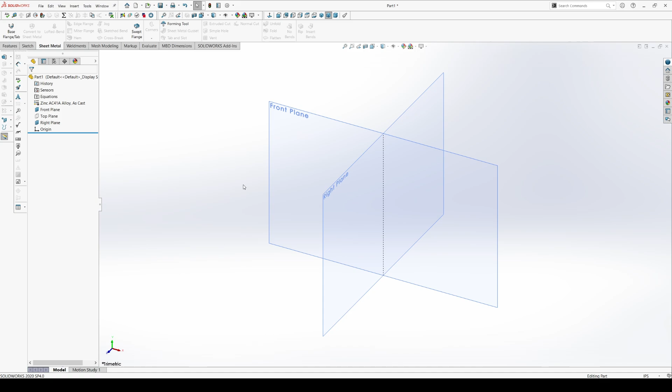So that's the very first step. You set your dimensions in inches and you set your material to that zinc alloy. And then you'll get started here.

You'll select the front plane and an extruded base. We'll just kind of sketch this real quick. Let's see what we come up with here.

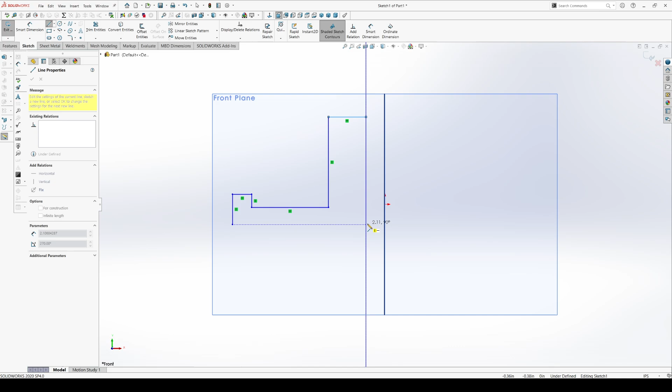Okay, you want this and this to be collinear, and we don't show the top plane, but we should show it, because we want this and this to be collinear as well.

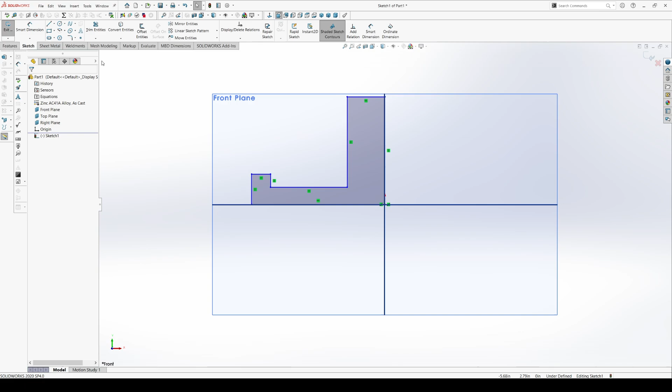Next is our dimensions. So we know this one is 5.375. We know this one is 5.375.

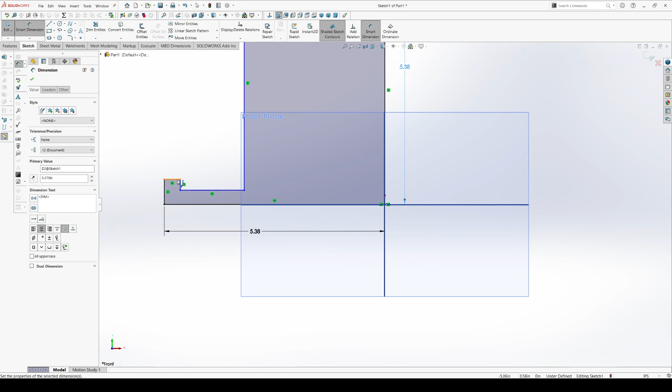It's getting a little funny looking, so we know this one is 3. And we know this one is .375.

Let's see what else is there. This one right here is 1.75.

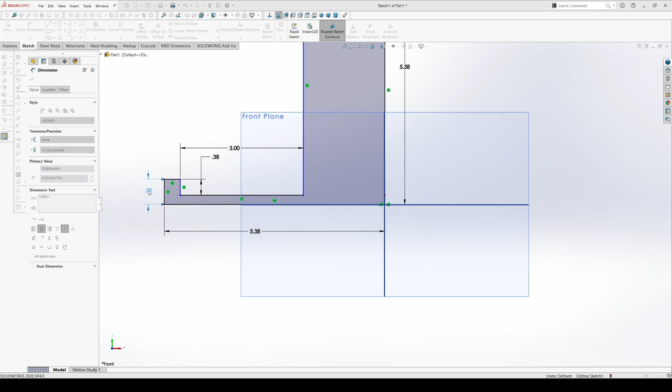And finally, this one right here is 1.25.

So now everything is constrained and everything should have turned black. And you can just hit the check at the top right.

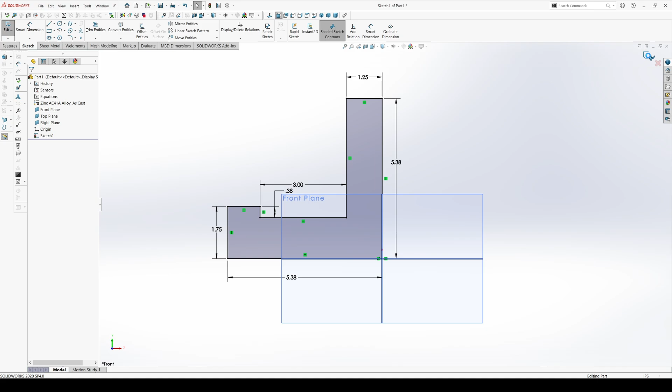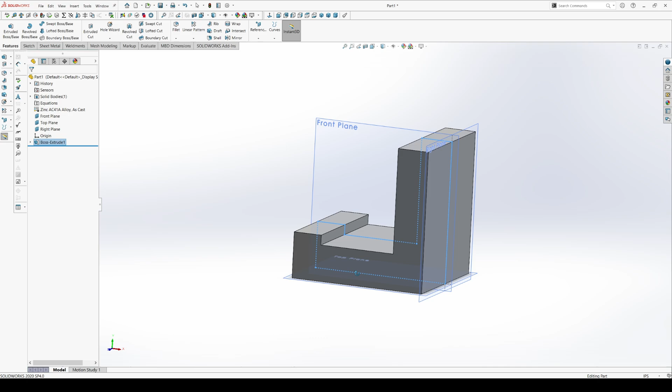And you'll start extruding. I like to use the direction as mid-plane, and then our extrusion should be 5 inches wide. Okay, so that's how the shape looks now.

We can get rid of the planes, so hide all of them. And I like to do... oh, you know, we skipped a step here.

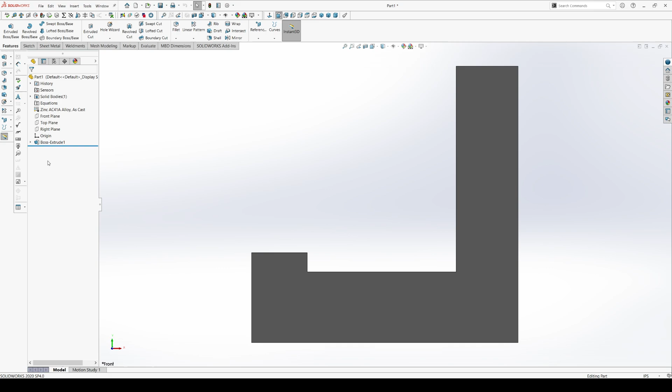So go back into this view and get back into your boss, your sketch for your boss, and say edit sketch.

And there's a fillet. So click on fillet right here, sketch fillet. And you want to click on this corner over here.

And that should have been, it says rounds and fillets are radius half. So it should be half. And then hit sketch.

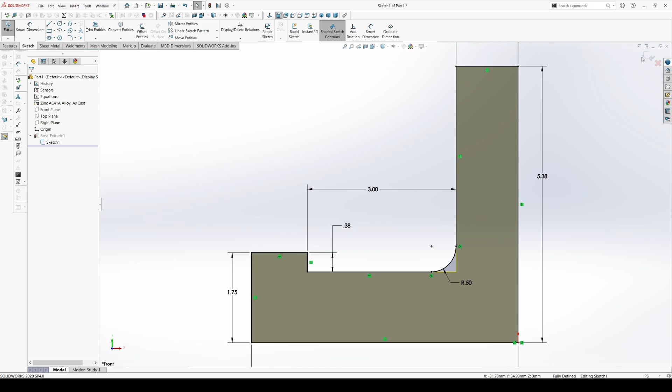And there's our new fillet there. So if we hit the check, it'll show it now. So that's with the fix.

And then we will go ahead and fillet these edges here and here, also to 1/2 inch.

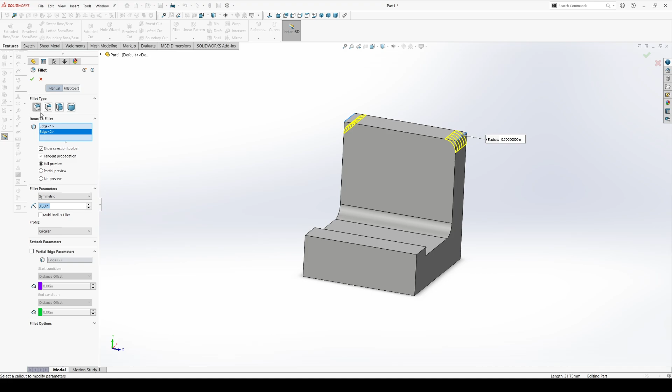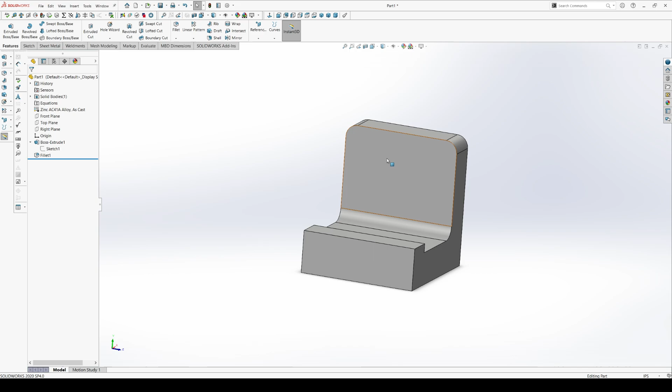And then, so we got a couple of cuts to take before... well, we can do the hole. It's not a problem. Your order of operations, it doesn't really matter so much on this part. Sometimes it matters your order of operations, but here it doesn't matter so much.

So we can start with the hole. It's okay, and just draw it anywhere.

We want it to be collinear with the front plane, so select on the point and add relation and select your front plane, say coincident, and so that'll be nice in the middle.

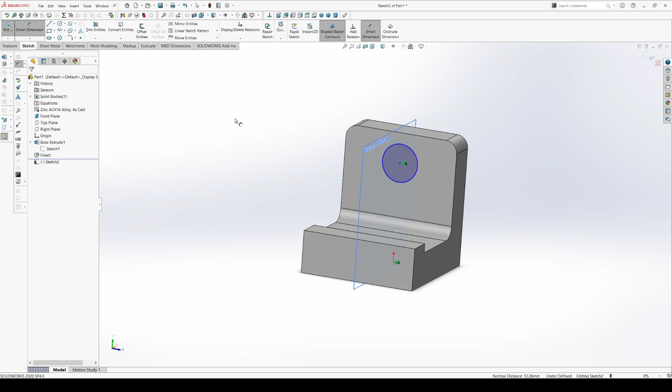I mean, the dimensions show it as 2.5 over, but because the part is 5 wide, it's sitting in the middle anyways, so you don't have to, you can just do that coincident, and that's all you need to do.

And then from the top, it's 2 down. And then your diameter should be 2. And that's it. It went black, so it's fully constrained.

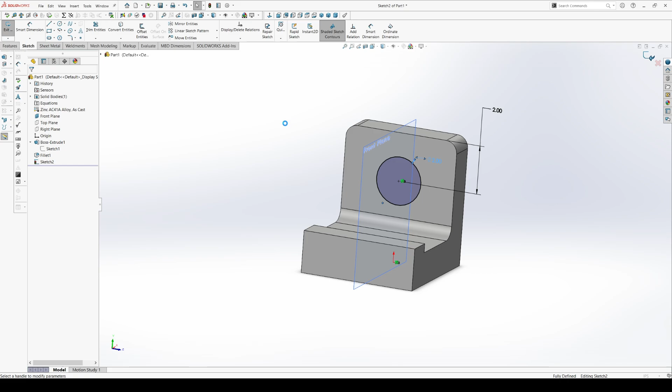You can hit the check. And you should be doing it up to next. And hit the check. And there's our hole.

And then, so that's that step. If you come to the front view here, hide this, okay.

Why is this showing the sketch? I'm not really sure why it's doing that.

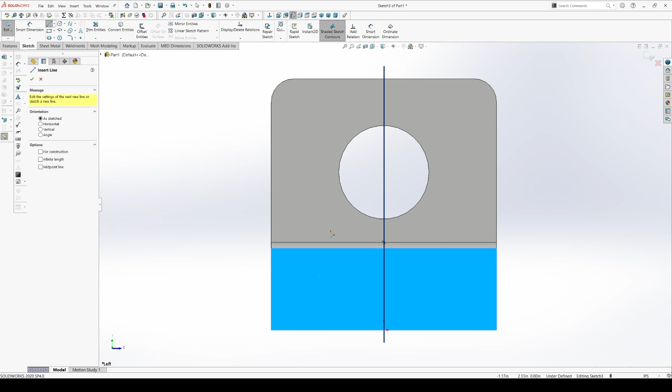Okay, so click on here. We're going to do an extruded cut. You just don't get it to snap to that, just have it anywhere. Vertical, horizontal, come to the dotted line right there. Come over, and it should close in, there shouldn't be any red warnings or anything come up.

So you want to smart dimension the bottom edge to the top of this right here. And this is 375.

The width of this should be... kind of hard to read that. I think it's 2.3, but I can't read it real well. You just have to confirm. It could be 2.3, it could be 2.5. Maybe we'll roll with 2.5. 2.5.

Okay, escape. And you want a relation here. Find your midpoint, so when you hover over the line and sit there on it for a second, midpoint will come up, and you want to hit add relation. Oh, it didn't capture that. So your midpoint and your front plane, you want coincident, so it centers in the middle.

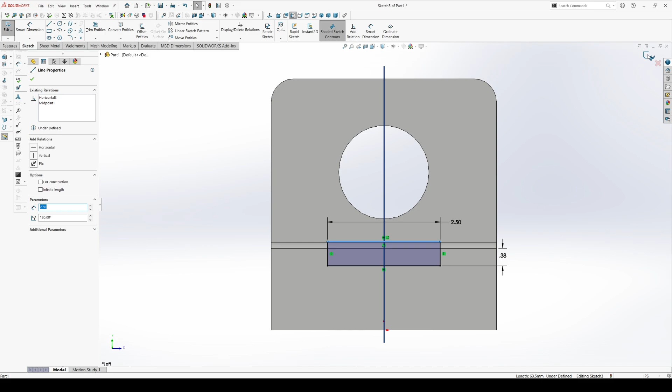And that's too much material, so we're going to do up to next, so it'll only take that little piece out. Hit the check, and there's that one done.

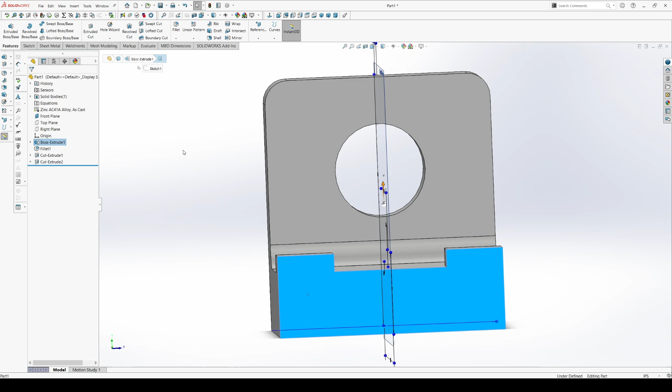And last but not least, we'll do the last cut here. Again, some arbitrary thing there, like so. And then from that line to the edge is supposed to be 125. Your width is... width is 3, so we were actually pretty close.

And then that should be it. Yeah, this doesn't matter so much. Oh, the location of it.

So you'll want to do add relation, come over here and find your midpoint, and snap it to the front plane. Coincident. And there, now it's centered on the part.

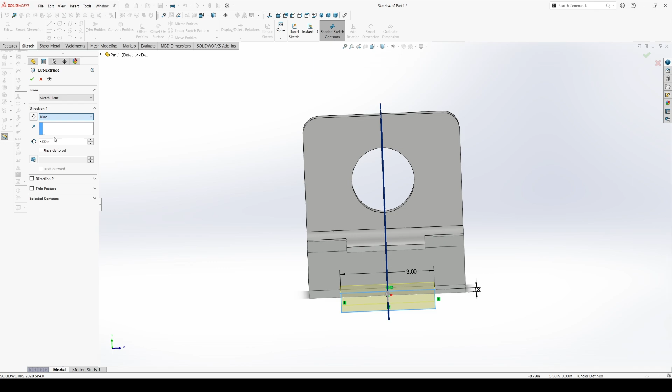And from the looks of this, I believe this cuts all the way through your part. So you will just do up to next, and that'll make it cut through the part here, and hit the check.

There is one thing that I have to confirm. There's a dimension that it's telling me here. So I want to go back into edit and see what it means by this dimension. So the edge of this and the width of that.

Okay, so it says, let's make that dimension driven since we snapped it to the front plane. The dimension's 1 inch, so that leg right there should be 1 inch wide. We got lucky this time that it worked out exactly, but sometimes that number could be larger or smaller.

So I would have said to put in that number first before snapping it to the front plane. I like to center everything, so that's most likely what they did, is they centered everything, and that's just a reference to tell you that what you did is correct.

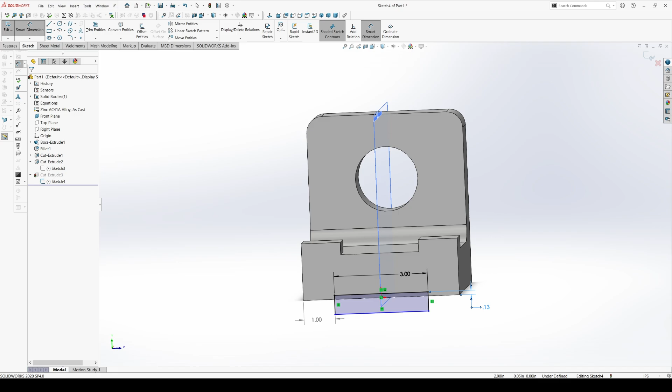So just hit the checkbox and get back out of that, and there's your part. I believe that's everything left on that part. Let's verify everything, see if we missed anything.

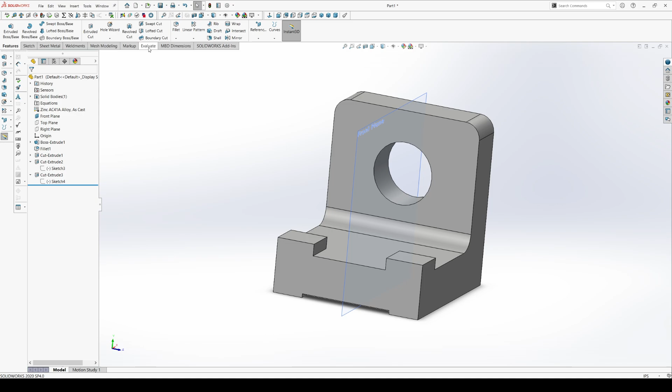Don't think so. Okay, so the next step to get your mass and volume, if you go up here to the menu, hit evaluate and mass properties. At this point, you should have a mass of 13.85 pounds and a volume of 57.2 cubic inches.

And this was all you need to find out for this project assignment.